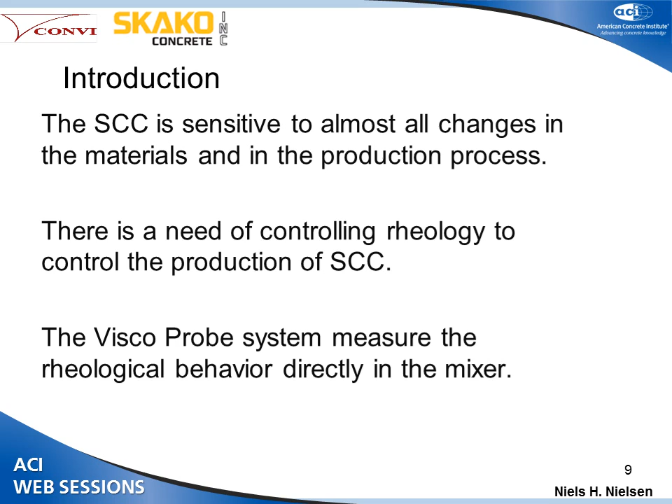As we have heard from Neil and Max, SCC is sensitive to almost all changes in the materials going into the production process, and there is a need to control the rheology to control the production of SCC. The Viscoprobe is a system to measure the rheological behavior directly in the mixer, and this will be the tool to help there.

Rheology in SCC is mostly about the Bingham model, and for this reason I'll introduce the Bingham model. I think it is known to most of you, but shortly: we have a velocity force diagram here.

To start a movement, a shear movement in SCC concrete, takes a certain force. This force, named B, is the yield stress. Increasing the shear velocity increases the force - that means as we increase the shear velocity, we get a higher force. The increase of the force related to velocity is linear, for this reason the straight line. The incline of this line is the plastic viscosity of the fluid, in this situation the concrete.

To put this into an equation: force equals A multiplied by velocity plus B. The A value is the incline of the line, and we normally call this the viscosity line for the liquids. The A value and the B value in this equation provide all information about the concrete flowability.

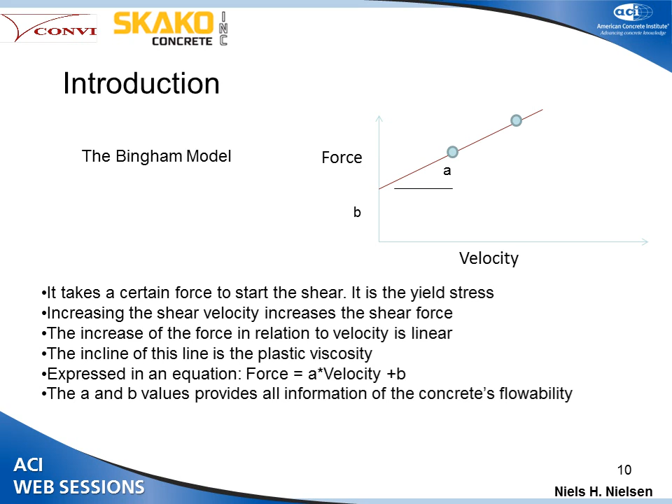Then the Viscoprobe. The Viscoprobe system has a measuring probe, and this measuring probe is built into the mixer. In a planetary mixer there is one probe, and in turbine mixers there are two probes. The probes are fixed to the actuators in the mixers - to the mixer star in the planetary mixer, and to the arm system in the turbine mixer.

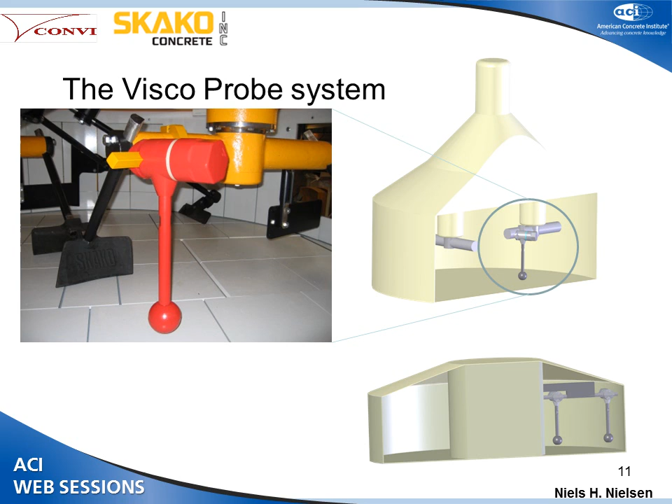The probe measures the shear force needed to force a ball through the concrete, and the shear force is measured by a load cell placed in this area of the probe. From the turbine mixer, from the two probes, we get out two shear force curves - the upper curve from the outer probe and the lower curve from the inner probe, due to the difference in velocity of the two probes.

In the planetary mixer, we have only one probe moving in a planetary movement. This planetary movement gives a sinus-formed velocity variation, and this gives out a sinus-formed shear force curve from the probe. By taking the maximum and minimum values from this sinus-formed curve, we get the shear force at two different speeds, and we can use this to put into the force velocity diagram and draw the viscosity line for the concrete.

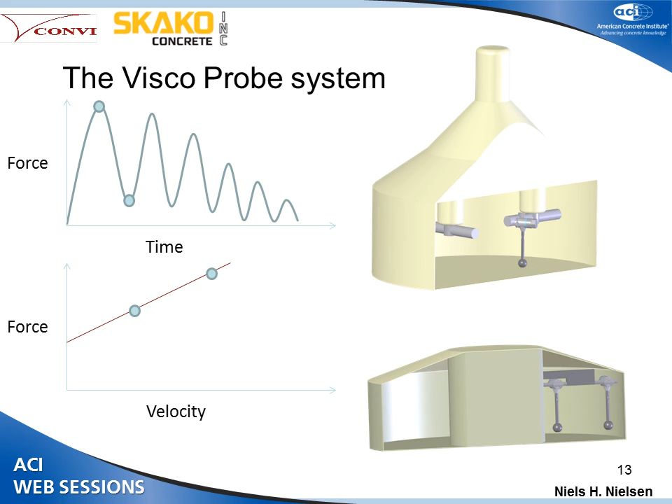Here you see when the level of shear force goes down and the amplitude goes down, we get a lower yield stress value, and we get a lower incline of the line - a lower viscosity of the concrete. The measured values are radio transmitted from the probe in the mixer to an outside receiver, and the outside receiver is cabled to a PC, having an interface showing the rheological behavior of the concrete.

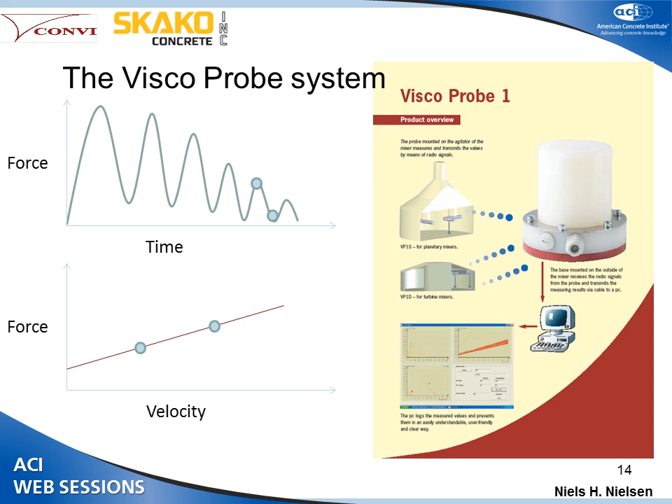The upper left diagram is showing the maximum shear force and the minimum shear force. From the planetary mixer, you can imagine the sinus-formed curve between these two lines.

Over here we have the viscosity line, the velocity, max velocity, the minimum velocity, and the shear force put up, and draw the line. The lower left diagram is showing the plastic viscosity and the shear force.

As I said, the two values tell all about the flowability of the concrete, and then the black cross is the actual state of the concrete in the mixer. So we know already when the concrete is in the mixer and mixed homogeneous, we know what the rheological properties are for the concrete.

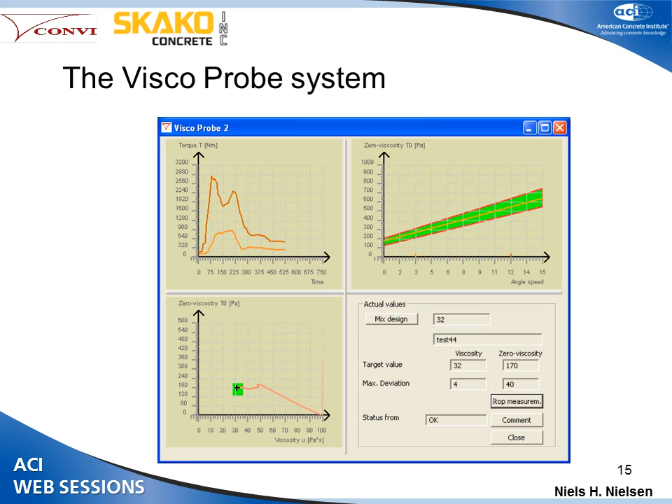The study we made at the Danish Technological Institute was to study the Viscoprobe response for a full production with the fundamental values of yield stress and plastic viscosity measured by the 4C rheometer.

The 4C rheometer is shown here. It is based on the good old slump cone, an automatic system to lift the cone, and then a camera to record, to film and record the flow of the concrete when the cone is lifted.

And this flow pattern is then monitored here, and comparing this curve to some mathematically made curves, they are able to take out the physical value of viscosity and yield value for the sample.

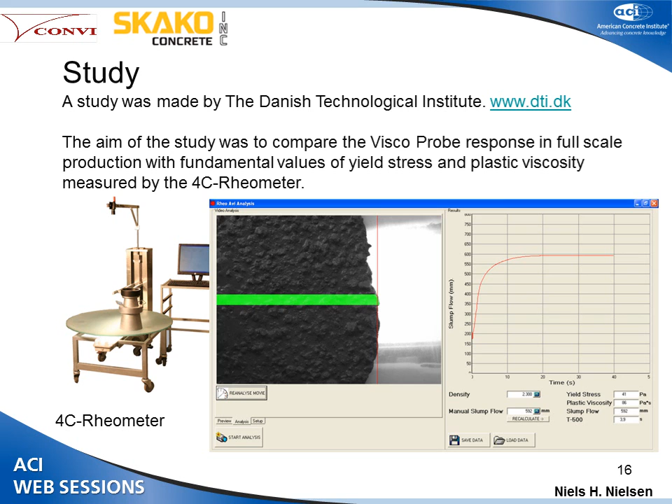The test was made at a Danish concrete production company in the CRH group, and the company makes prefab, pre-stressed concrete elements of various kinds. The test was carried out in a Horab 3,000 liter mixer.

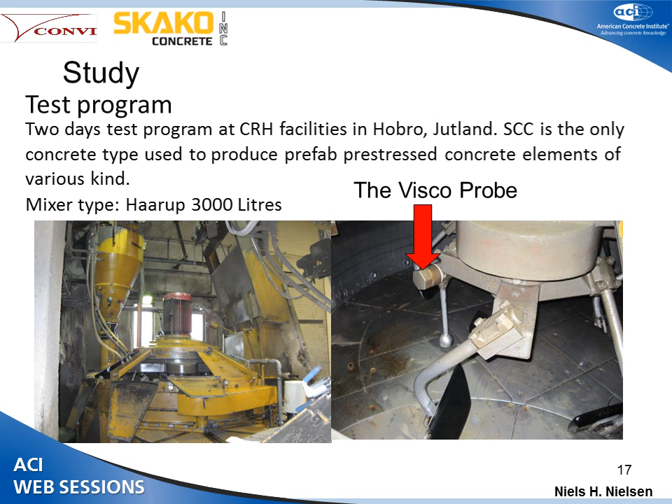With a Viscoprobe. In this situation, we only monitor the values from the Viscoprobe. The Viscoprobe is not connected to the control system.

The concrete was mixed and transported to an intermediate hopper, and from this hopper it is discharged into a crane bucket. From the crane bucket, the sample was taken in a wheelbarrow and wheeled back to the lab where the test was made on the 4C rheometer.

And after this, it was cast in the mold.

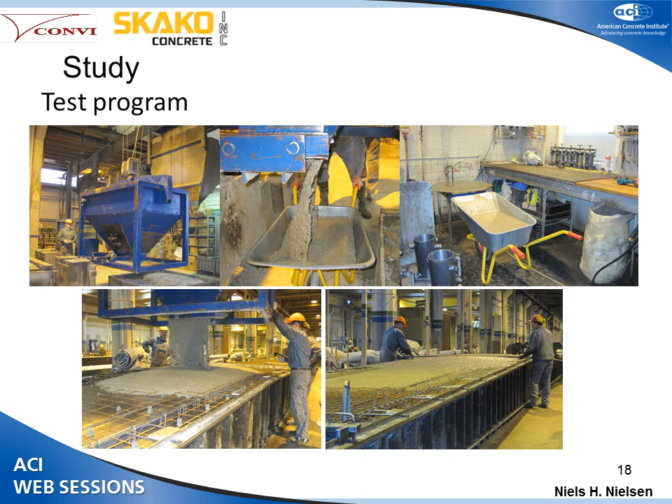One example of the result for mix design number 50. We have here the blue spots which are the 4C rheometer values, and the green-yellow are from the Viscoprobe. And they are, as you can see, pretty close to each other.

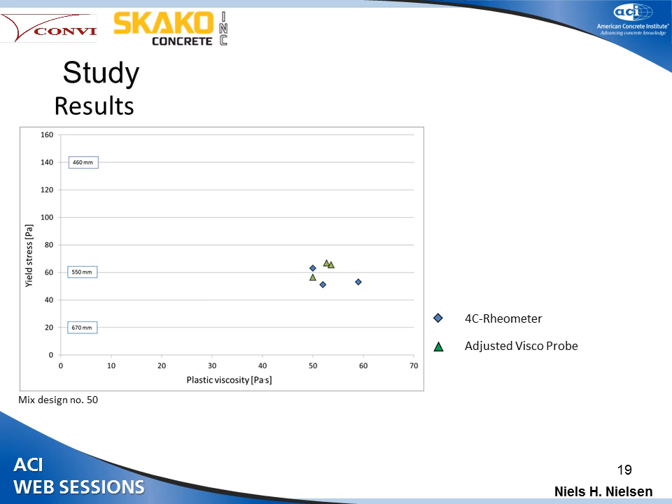That leads to a conclusion, or first two facts. There were made 21 batches of SCC, and it included 5 different mix designs. The conclusion from the Danish Technological Institute was that a reasonable correlation was obtained on the plastic viscosity and yield stress, both within the same mix design and between the mix designs.

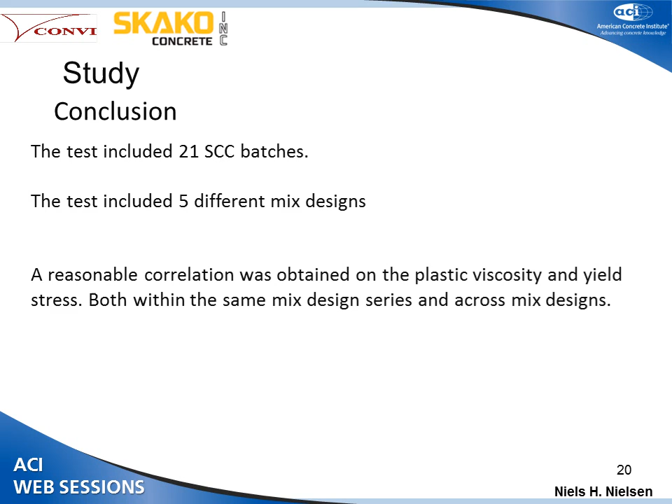Quality control issues. I think that Max was telling most of what I have been trying to say here. It takes a well-equipped and a well-run plant to make SCC concrete.

But it also takes skilled people to make the right mix designs and make the right day-to-day decisions or batch-to-batch decisions, to make the QC work on the incoming materials, to make sure that the changes are within accepted limits, and to make robust and cost-efficient mix designs.

Defining the right flow properties of the SCC to get a good filling of the mold and to get a good surface of the cast elements, and defining the best pattern of filling the mold. That's also an issue.

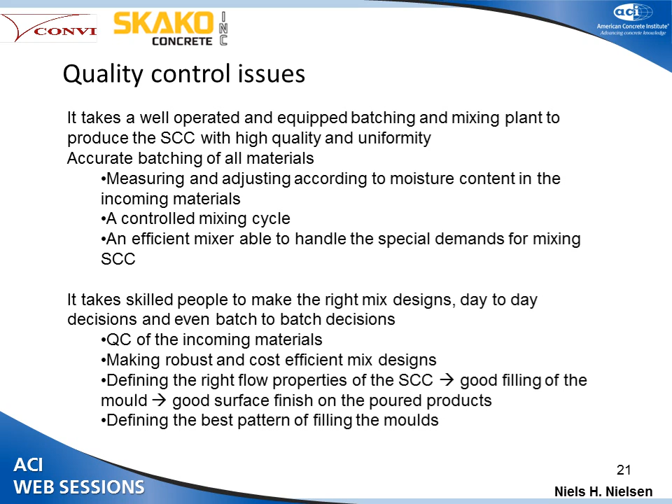From the Viscoprobe, we get a picture like this when we are monitoring the mixing or the homogenizing of the concrete. We see the materials going into the mixer, the water and admixture bringing down the shear force, and after that we get a nearly horizontal and straight line, or 2 lines to be exact.

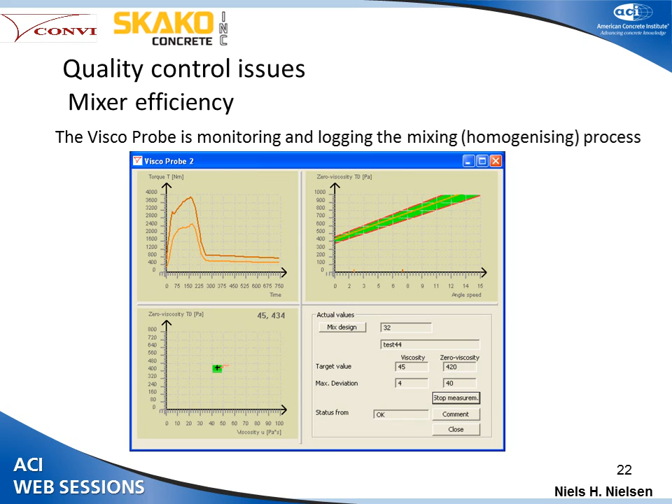If the mixer can't cope with the job, we get a picture like this, for instance, where we can see that the max shear force value never stabilizes, and the mixer discharge happens before the mix is homogeneous.

This is another one where it looks as if it is nearly getting homogeneous here, but then the force goes up, and at the discharge time we get a big force on the Viscoprobe. That means that there was some unmixed, more or less dry concrete in the mixer when we discharged.

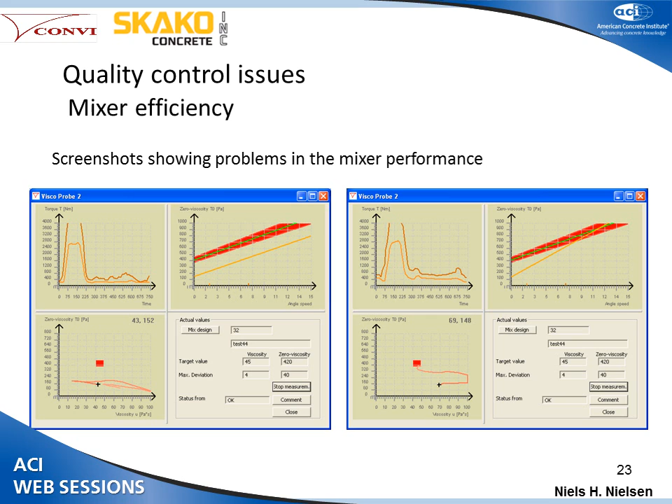More quality issues. The Viscoprobe is measuring in the full batch. That means there is no discussion about if the sample taken to measure the rheological values are representable for the full batch. It is simply the full batch giving the values.

And the Viscoprobe is measuring in all batches. That means there is no discussion about which batch we are going to take a sample from to check. We get measurement from all batches, and we get the measurements without use of manpower.

The measurements are taken when all materials are in the mixer. That means all small variations in the ingoing materials, small variation fines in the sand and concentration of admixture and things like that are taken into consideration when the measurement is made by the Viscoprobe.

And the Viscoprobe is measuring rheological values for plastic viscosity and yield stress. And it makes it possible to make correction to the batch before the batch is leaving the mixer, so that the rheological parameters can be brought to the right value before the mix leaves the mixer.

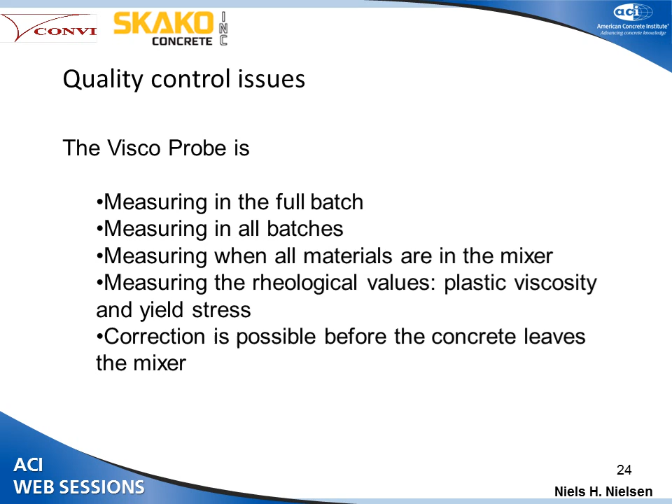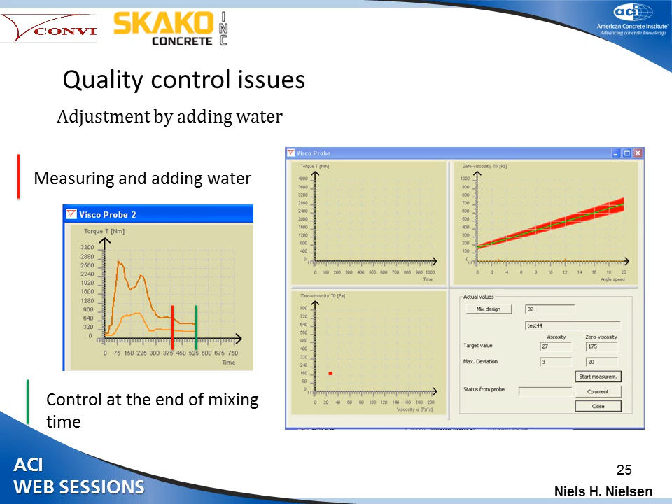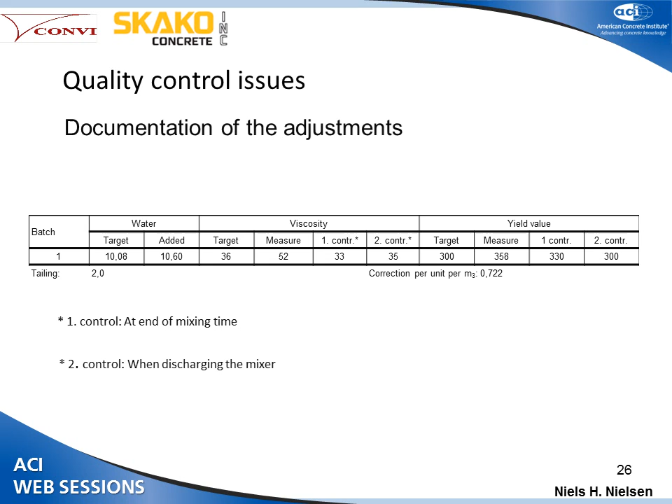Robustness of mix designs. Big efforts are made to make robust SCC concrete, and often a high content of powder, fines and chemicals are used to cover over the lack of control during the production process.

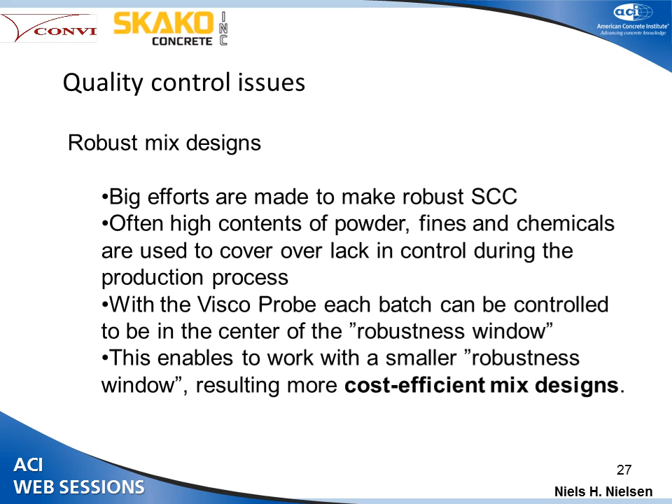With the Viscoprobe, each batch can be controlled to be in the center of the robustness window, and in this way the robustness window can be made smaller, and it is possible to make more cost-efficient mix designs. You can see this target area for the Viscoprobe as a sort of robustness window. If you make sure that this square is within the shape of the robustness window, you are sure that if you hit the target area, you have a robust concrete.

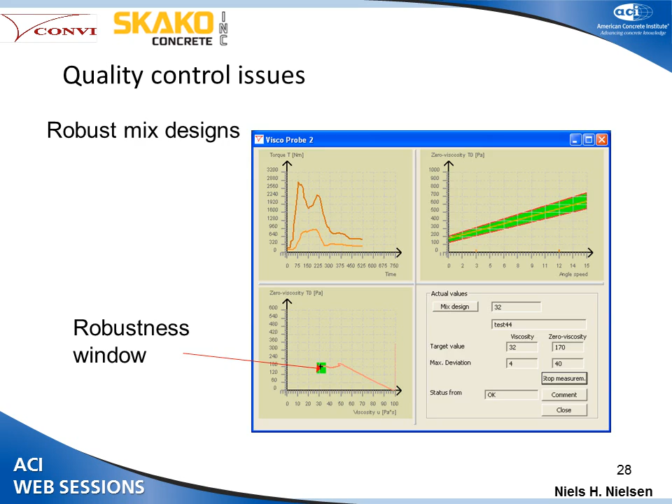Also, the surface quality of the casted elements is sensitive to the casting pattern. So if you define and control the casting pattern, and you control and document rheological values, flow properties for each batch, if you have these quality issues under control, it leads to better looking products and lower cost to surface repair.

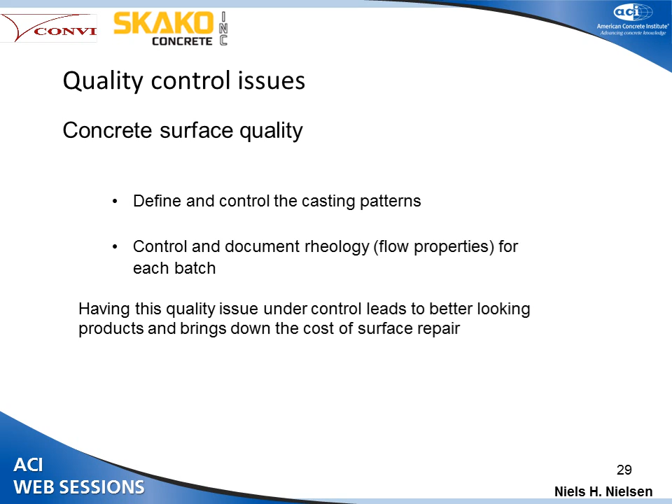That leads to, by having the quality control department, the concrete production, and the casting area, the quality control department makes the mix designs and decides the flow properties and gives this information to production. They produce the concrete with the right rheological values and deliver the concrete to the casting area.

And then if people at the casting area don't agree completely, then they discuss with the Department of Quality. And if they think that it's necessary to make changes, they discuss with the production about it. This is a normal way of acting in a lot of industries.

Today, the most normal way of acting in the concrete industry is that the conversation is going here. They call back from the casting area that they want to have more water in the concrete. The man at the mixer adds a little more water to the concrete, and a little later they tell him they want a little less water in the concrete. This way they act as quality management, all the people in the casting area.

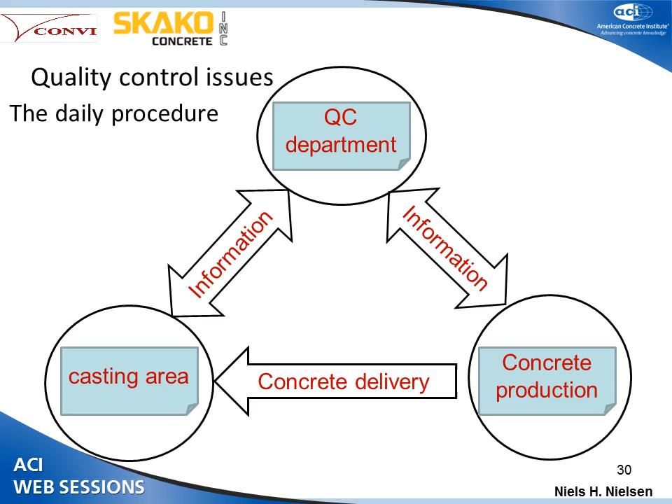With the Viscoprobe, it is possible to measure the values in production, and then there's something to discuss with the quality department about. The Viscoprobe doesn't give all answers to production of high quality SCC, but it's a huge step in the right direction. Thank you for your attention.